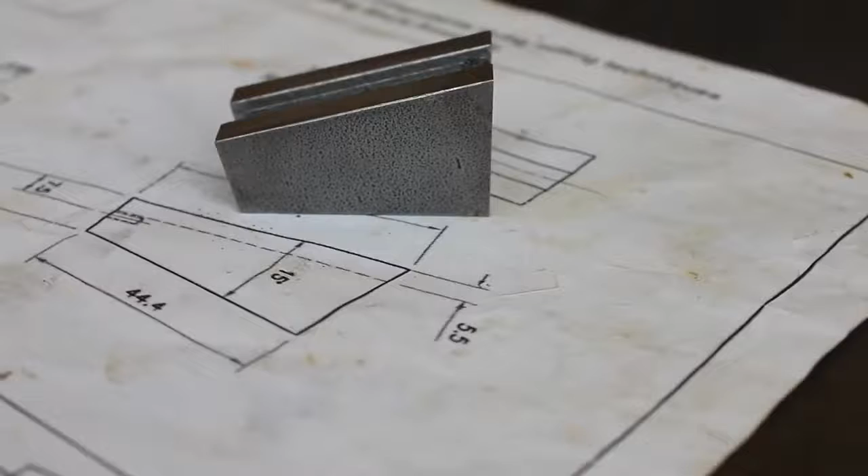This is 5 Minute Friday number 3, and today we're going to be measuring and inspecting angles using a sine bar. This is part of the sliding block assembly, which has a critical angle of 15 degrees on this taper here. So we need to inspect this edge to check that it falls within our 0.15 degree tolerance.

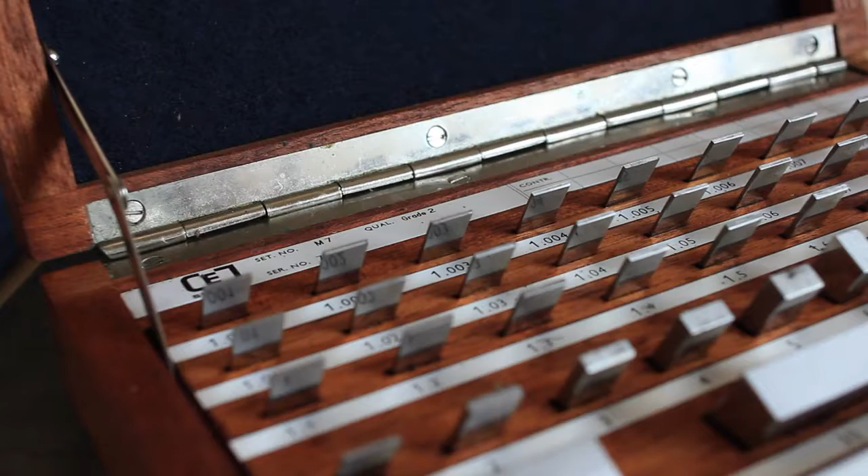To do this, we're going to need a set of gauge blocks or slip gauges, and we're also going to need a tool called a sine bar. The sine bar that we'll be using is a 100mm metric sine bar, and that's going to allow us to measure the angle.

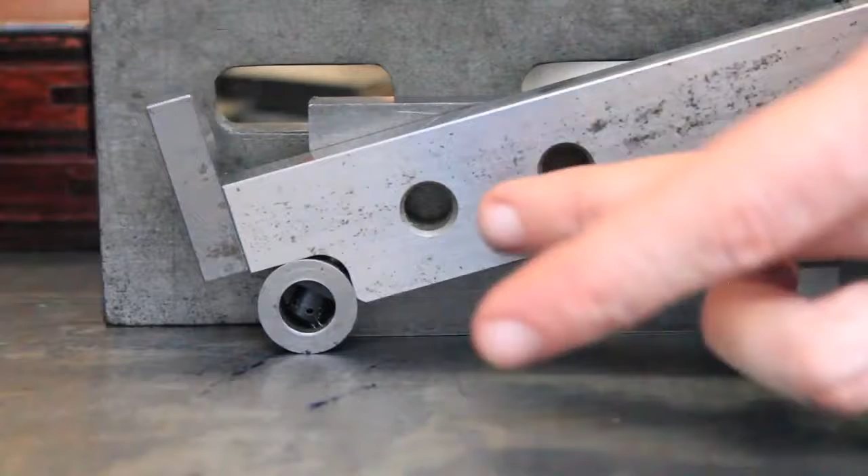The principle of this is that we're going to create a stack of slip gauges on the right hand side, incline it at an angle, and then the sine bar can be used either to scribe lines in layout, or it can be used to inspect angles with a dial test indicator.

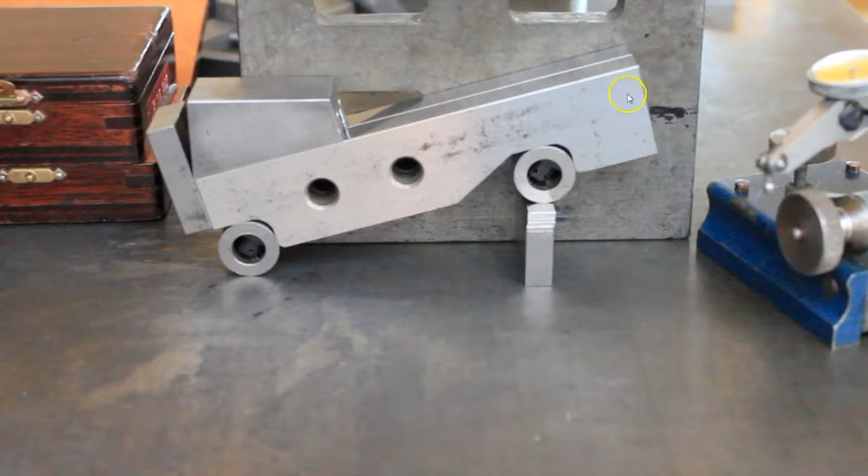So this is an image of what we're trying to achieve. We're trying to incline the sine bar at an angle of 15 degrees so that when we run the finger type DTI across the top of the surface, we can check for any movement, and this surface should be flat.

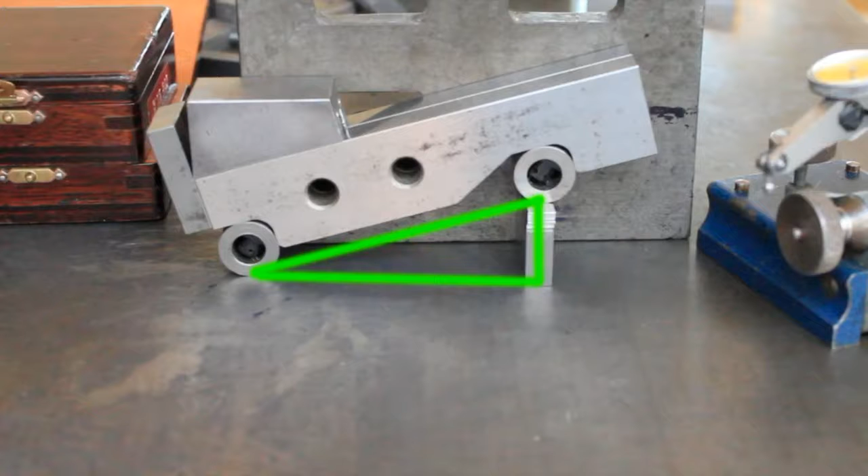It's called a sine bar for good reason, because these points here are exactly 100mm. That's the hypotenuse of a triangle. The slip gauge stack is the opposite side, and we form a triangle there. So we need to apply a bit of secondary school or high school trig to find the exact height of slips required to create the 15 degree angle that we require.

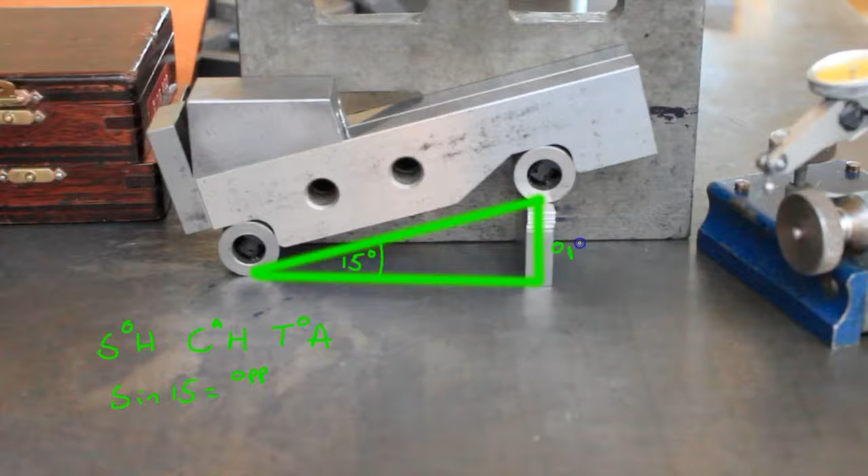So you probably remember SOH: sine 15 equals the opposite, which is our slip gauge pile here that we don't know, we're trying to find that out, over the hypotenuse, which is this known distance, 100mm sine bar. And we can rearrange that to get sine 15 times 100 is equal to the slip gauge height that we need.

So we'll need to put that into a calculator. If you're not too familiar with trigonometry, you can just use an equation triangle. If you're not so good with transposing equations, cover up the O, and it's sine times h. If we needed to find the angle, it'd be the opposite divided by the hypotenuse.

So let's chuck that into a calculator. There we have it: 15 sine times 100, and it gives us 25.8819. Our slips will measure to the thousandth, so we're going to use 25.882.

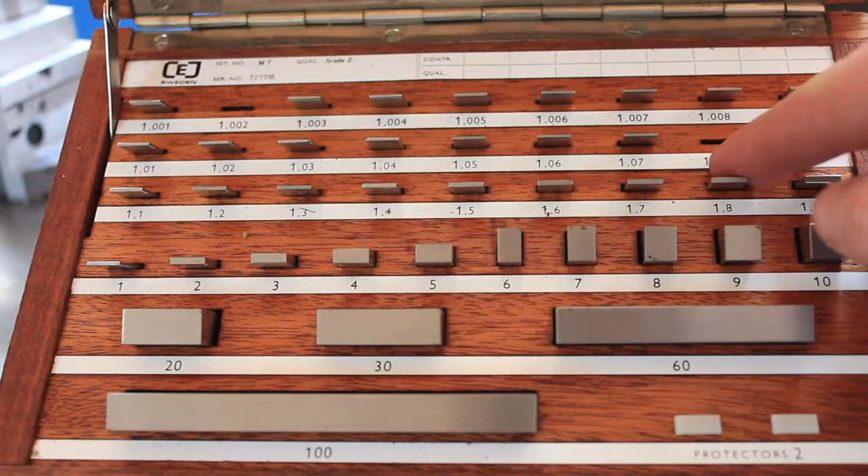25.882mm. So what we need to do now is pull those out of the slip gauge pile, and to do that we'll start from the right. We'll have a 1.002, a 1.08, a 1.8, and 22mm of other slips.

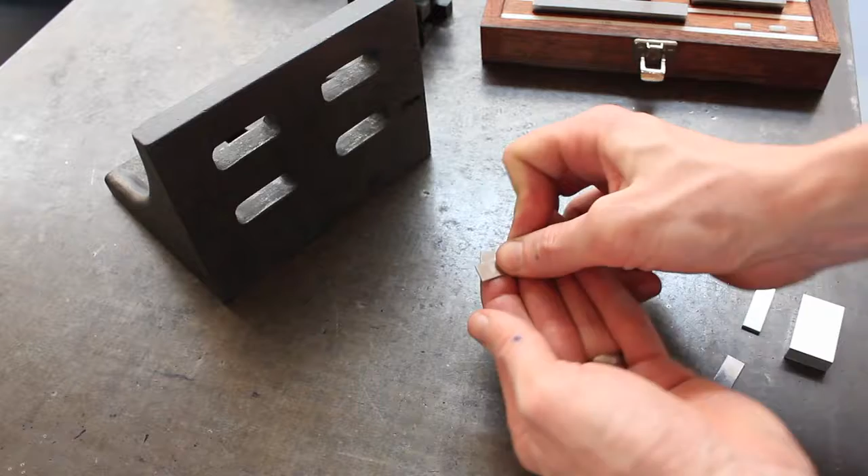Once we've chosen our slips, we need to ring them together, which means basically put them at 90 degrees and twist them with a little bit of pressure, and they'll stick together due to molecular attraction. Now what I'm doing here is actually bad form - you shouldn't put them in contact with the surface plate, and certainly not slide them like I did, but we're showing the point that they will stick together to create the accurate height.

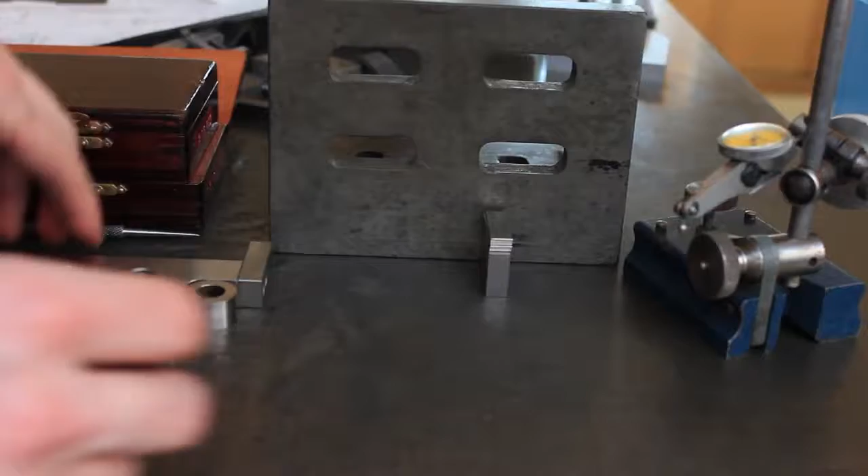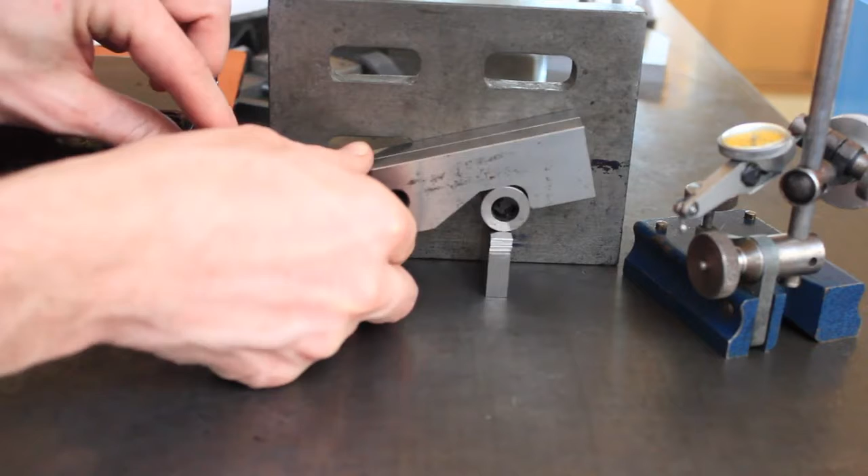Once we've got the slip gauge pile, we can place that against an angle plate. That section is unnecessary but helpful for getting everything squared up. Now I'm going to use 2 sine bars as opposed to one thick one, and we're going to support our sliding block on top of there. If everything goes correctly, then we should create a flat surface there due to the two 15 degree angles.

What we'll do is run a dial test indicator across that top surface so that we can check whether it's running out or not. If it doesn't run out, we'll get a reading of 0. So we need to line up our DTI so that the finger is roughly at an angle of 20 degrees or so when we first start. That way, when it makes contact with the block, it's near enough horizontal, and that's going to reduce cosine error.

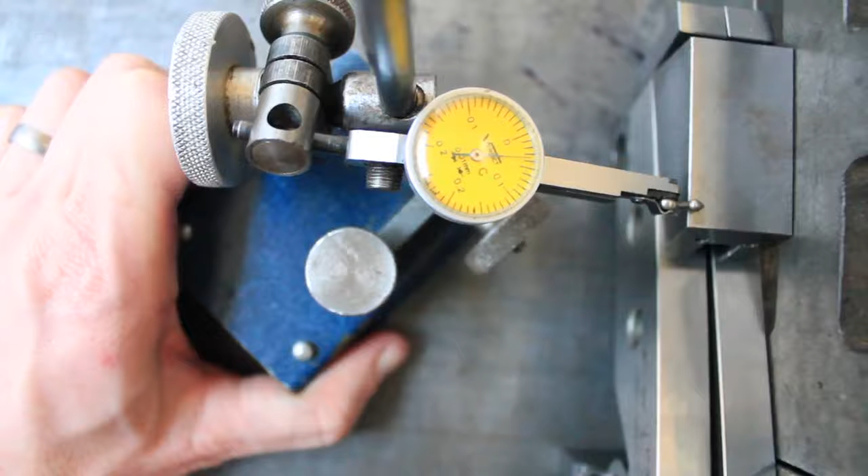Then we can move it back and forth. Once we're happy that it's in correct contact, we can zero out the gauge for a setting, run it back and forth once again, and make adjustments to the slip gauges on the right hand side so that it does actually run flat true. Here we can see it's actually raising a little bit, so it's probably a little bit low at the bottom there. So we need to add slip gauges to reduce that error.

So now we're faced with a situation where we know the opposite side, so perhaps we've adjusted that to 25.951, and that causes it to run flat, which means now we've knocked this angle out. So we're actually going to find out what this angle is here. This is an unknown angle, and the convention is to call that unknown angle the Greek letter theta.

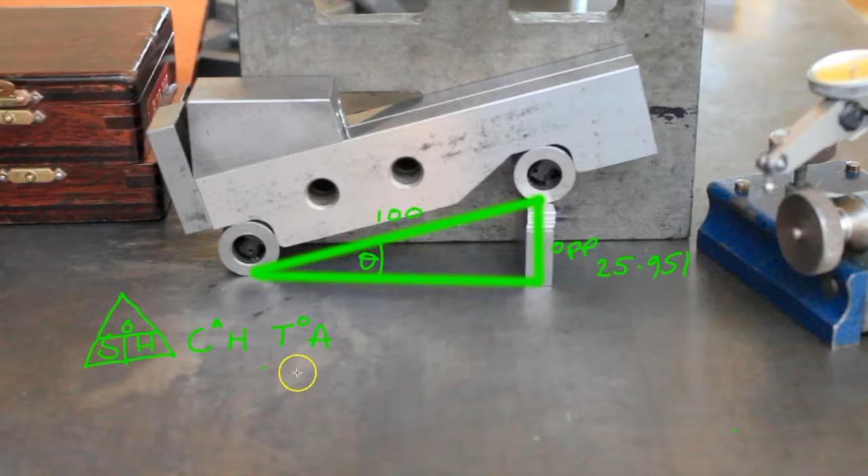We're still going to use, in essence, the same type of equation, but this time we need to find the sine theta. So sine the unknown angle theta is equal to the opposite, which in this case is 25.951 divided by 100.

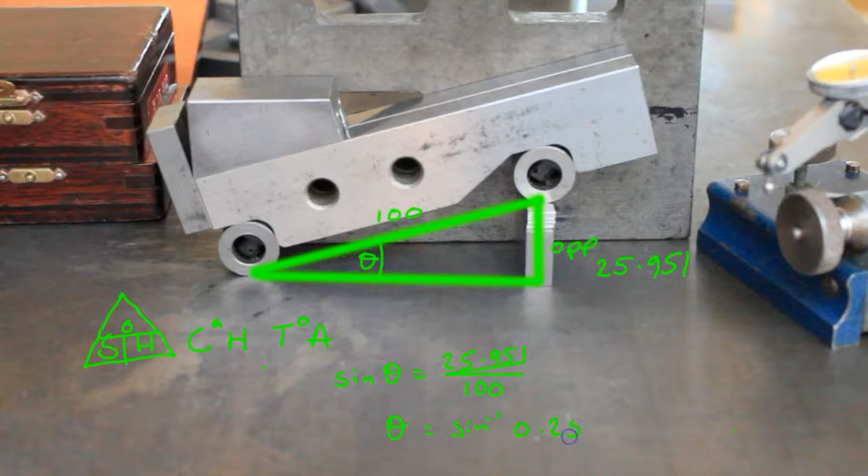So we need to process that, and to find out theta we're going to use the inverse sine of this, which should be 0.25951. Again, we'll put that in the calculator: 25.951 divided by 100, sine to the -1, so inverse sine to -1. So the angle that we've actually inspected there isn't 15 degrees, but...

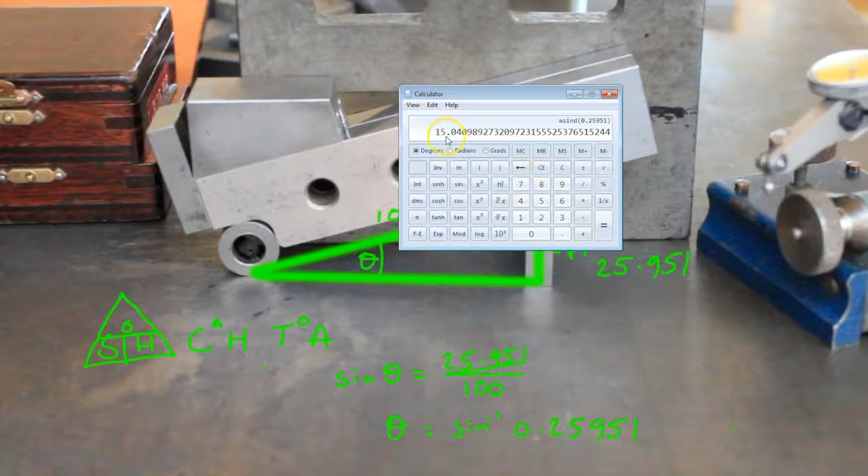15.041, which is amazing considering with so little equipment we've managed to inspect to 1/1000 of a degree.